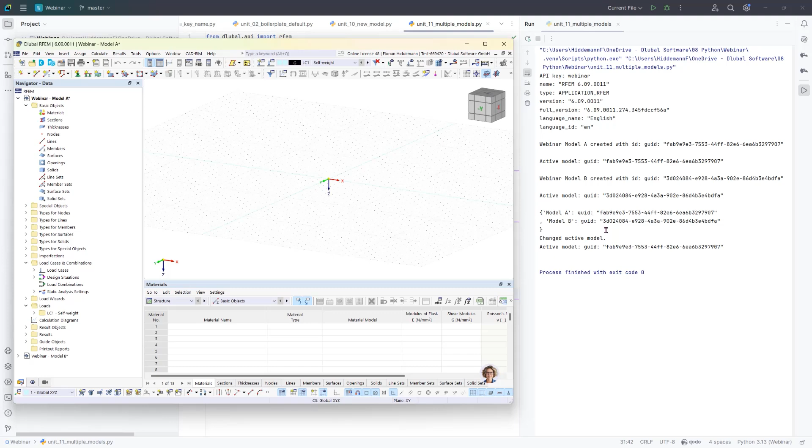This is the active one. The second one, model B, is created with this ID. RFEM switches the active model to this one. This is stored in our dictionary, and I can change back to model A with just a simple call.

If you are in an active model, every other API call uses this model for manipulation. So you can have in one connection working with several models, switching back and forth and getting information at runtime about which model you're actually in and where you want to go.

Another important use case to work with models is if you already have an existing model as an own RFEM file. In this example, I will open a model from an existing RFEM file. This is stored and set up here as an absolute path. It's in a raw string, and we just make our connection and say, open the model from this path.

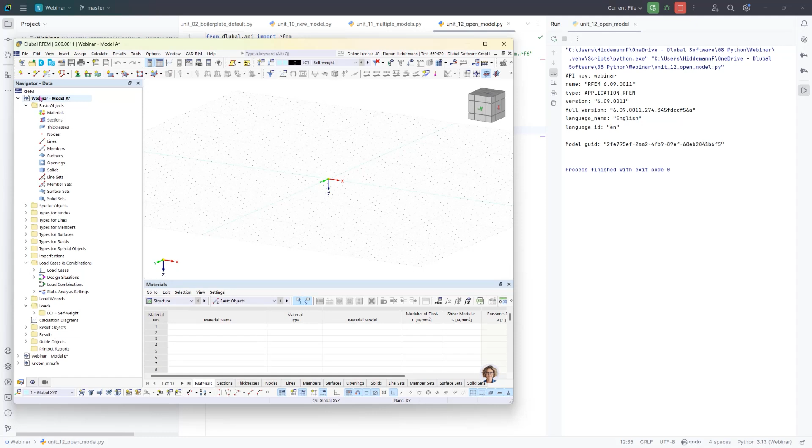What we can show just here—I prepared a simple example model. So we can see it opened and get its model ID back.

This model is the one prepared, and I set it up with other units here as a model setting, where you can see it's not a freshly created one. Important to say, we are working with SI units here for all input values and for all output values, which we see later on in the results.

This is now the installation and getting started part, working with multiple models. Now we change to the principle of operation, how to actually work with RFEM objects. We'll look at the mapping of the structure navigator and the API structure, and how to deal with the properties and make new objects and update them and so on.

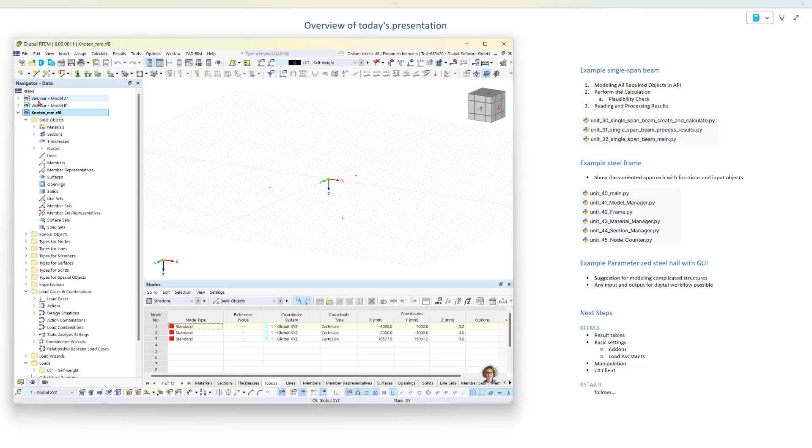If you are familiar with the RFEM structure itself, you will see that our API is trying to get as close as possible to the structure in the navigator. You have here some basic objects, structure core, structure advanced as we call it in the API, types for nodes, types for lines, and so on, nodal supports. Everything you can see and navigate through, we try to replicate as far as possible with the structure of the API itself.

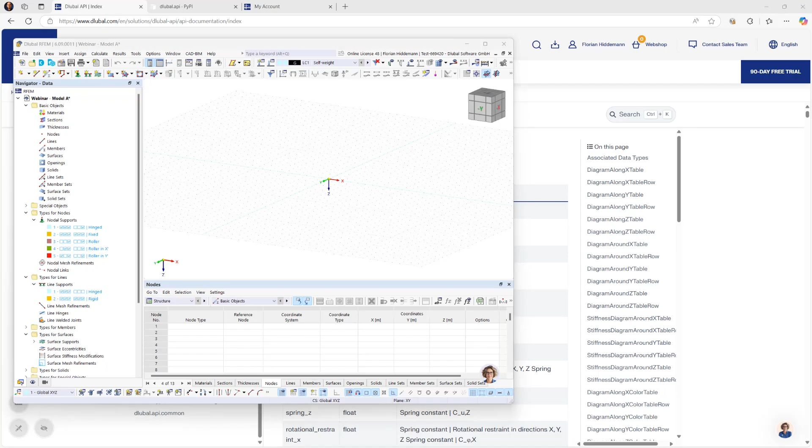So you have also structure core, which is lines, nodes, members. You have the loads, the loadings, and you have types for nodes, nodal support. This really corresponds to the structure you can see in the main program, just to give you a better insight into where to look for some objects. So how is it working now? We start by creating a simple node.

When we make a new model, this is called create node. First, I define my node with the wished properties. In principle, you can say we have two steps every time, or two separate roles.

One is I'm working with model objects from the API. You can see here, this is a node using the structure core from the RFEM package. This object here is used to define what I wish as a user to model in RFEM. And this node object is given as a gRPC message to my actual API call.

The API call, we don't have so many API calls like in our first generation. You can see the API call itself, it's very lean. We have calls to calculate, to create things, to delete things, to get things, save things. There are some specialities like a plausibility check and so on, working with the models I showed you. But this is really it.

There are 30 or 40, maybe in the future more, API calls, and a lot of objects to define and transfer. All properties, all model objects are defined by these model objects API.

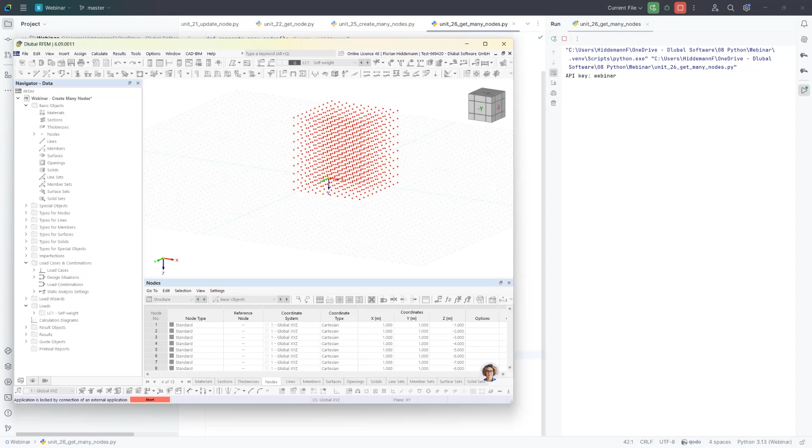So let's see what is happening. Just open RFEM, create these nodes again, and what's happening right now is we hold here, print and hold, and say, okay, show me this node list you returned. This also is a self-defined class in our package.

It's not a dictionary, it's a special object which is representing our object ID list. This list has all the node IDs and says, okay, this is an object from type node. So this is a way to get back which ID is defined via this call for many nodes. It answers with: I created 1,000 nodes, and here's what I created. The last one has number 1,000, and it was a node.

So if I want to manipulate these nodes later on, first I need to create my own list where I store dummy objects which contain these node numbers. And to make an iterable object from this returned node list, I have to add object ID after it. Now I can iterate over it in Python.

We will make a new real list, which is called dummy nodes. And for each item in this object ID list here, which is iterable, I will append a new object. It's a new node containing exactly this number we see from this output. So after that, we have a list with dummy nodes, and let's have a look at this.

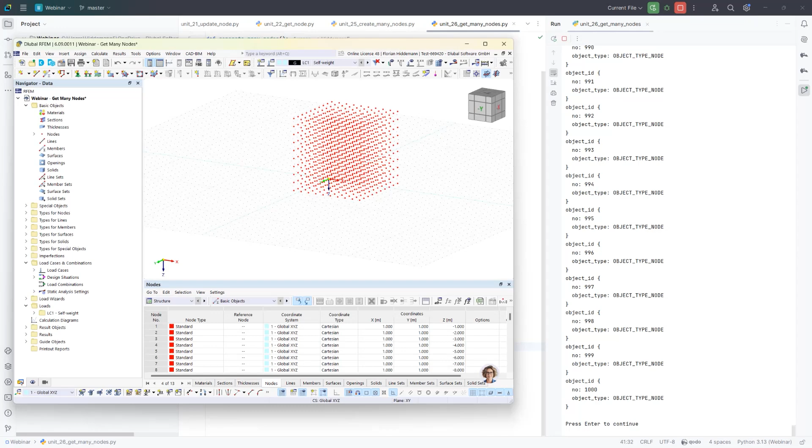Oh, isn't it working? Yes, no. Okay, now it's doing second and third one.

So we printed the list with dummy nodes, and if you print a node and the only information it has is its number, it prints its number. So we have stupid nodes which has their number, and with this list I can work later on to manipulate them. But this is the first example, a workaround how to get numberings from a node definition at the moment. We are working on improvements about it.

So if you have now the IDs, then you can ask RFEM, okay, give me the objects for nodes with this ID. And this is the last step here we just saw. This is corresponding to what you see if you get a single node information. We are doing the same like here with an object list, with a list of node IDs. And we can see these are the informations for each node we have created with the many nodes function.

So now we can also update a lot of objects at the same time. Like last time, it's an extension of the shown example. We have the returned object list, and I just made a helper function which is handling these object IDs and making the dummy list for me. It's returning the dummy objects. I show you in the last step here as an own block, and they are stored here. So we create the many nodes, save the returned objects, make our dummy nodes. The dummy nodes is a list with the IDs of the nodes, get the object list from that, and store this as node objects. And then I want to edit those coordinates from these objects by a specific offset.

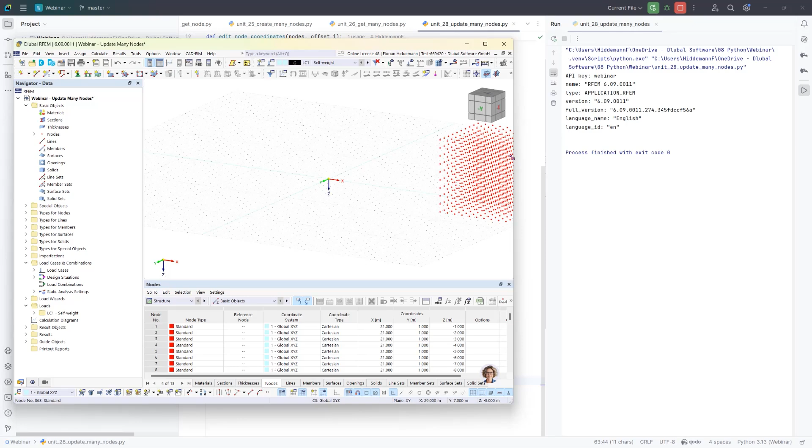So now let's dive in finally into the small real-life example of a single span beam. We will use the principles we got to know in the first 2 chapters here, playing around with nodes, and now go for other objects as well to model a single span beam.

If you look closer here, we are doing exactly the same like with the nodes. We will slightly restructure it here to make this work within our own create and calculate function. The single span example is split into create and calculate, processing of results, and a main script which is calling both of them by importing these unit examples here.

Let's have a look into create and calculate. We will again define all model objects with one creational call, create object list, you know that in the meantime. And the specialty is that we are defining all model objects in one list, not only the nodes. So if you can see here, yeah, we have the same small import with Dlubal API RFEM, and we have the nodes, we have the line, we have material, section, and member. Everything in this structure you already are familiar with.

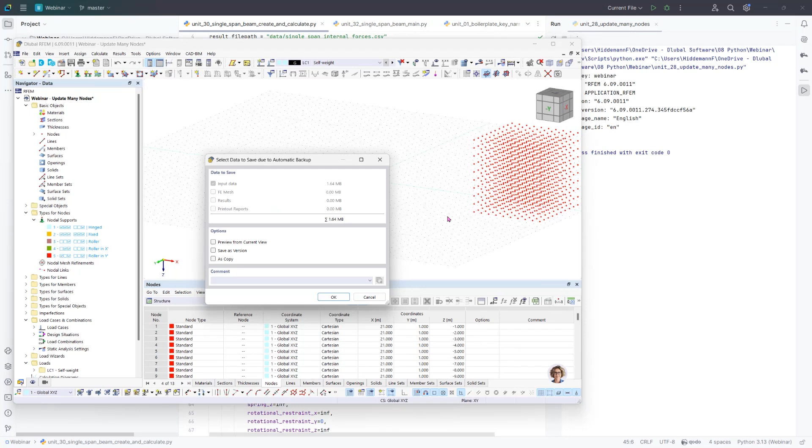If you want to define material and section, maybe you know it from applications in the past, just go into these RFEM settings, for example, and try out what's happening if you look for a special string. What's happening in the background is if you put a string as a name for a material or cross-section, RFEM looks up the first option it finds and uses it later in the program, so you can check it on the fly, what is what.

In this way, we also define the loadings, design situation, static analysis setting, load case, member loads. Remember, it's defined in SI units.

And why is it important to define everything from scratch? With this call, I delete all existing objects in the RFEM model. By default, if we create a new model, some objects and load cases come as default, and with the delete all objects call, every one of these objects is deleted. So you have to make everything from scratch.

As well as here, as in the examples on our website, you can see different types, not only the nodes I showed before. You can have a look later on, or every one of these unit lessons will be provided after the webinar for you. So once you've defined the object and created it, we will perform something new.

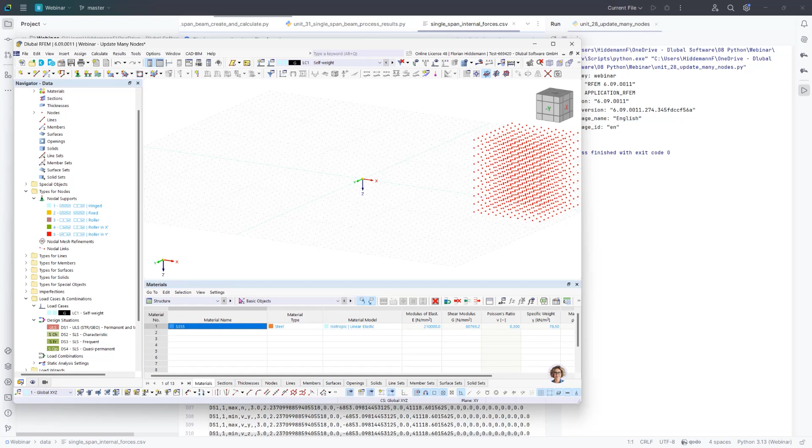The result format you will get is more or less directly orientated — this is the CSV we will get. It represents the table you can also view in RFEM. So the whole structure of getting results is based on the structure we get in the results table too.

Let's see what happens in the program if we start it. You can see what happens in the background on the right side as well. The plausibility check was successful, true, so the calculation just started. You can see it here, bottom left.

And now it is getting the results, processing them, and printing out what we defined here in our little process script, just to give you an idea how this is working. Let's check what we found out.

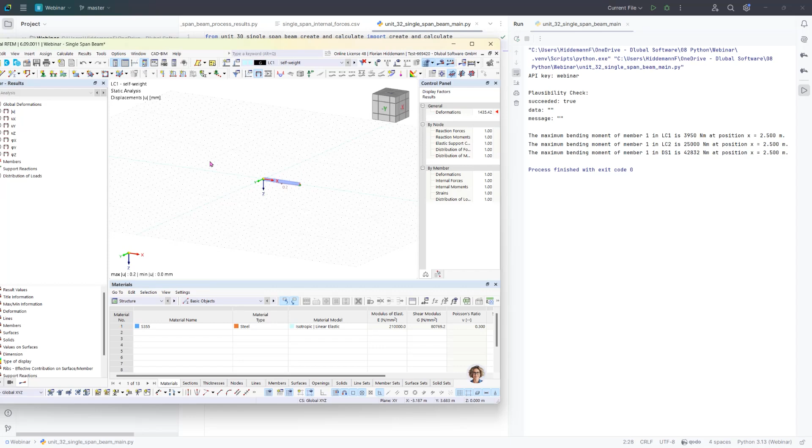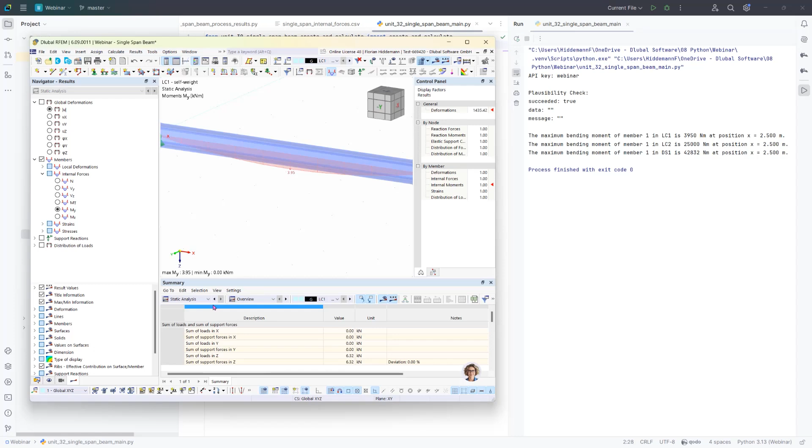If I go to the server here and activate the results, we looked for the maximum bending moment over the y-axis. So it's 3.95 here in SI units, Newton meters, at position x, 2.5 meters. The whole beam here is 5 meters. So this is plausible, and you can see if we have the results table for static analysis.

And go, for example, into results by member, this type of presenting the results and the internal forces here corresponds with the logic the CSV file is built up in the background. So if you get the results, it's more or less oriented to the logic you see in the result tables. Again, we try to make it as comparable as possible to the RFEM structure, like with the navigator for input files, for input objects.

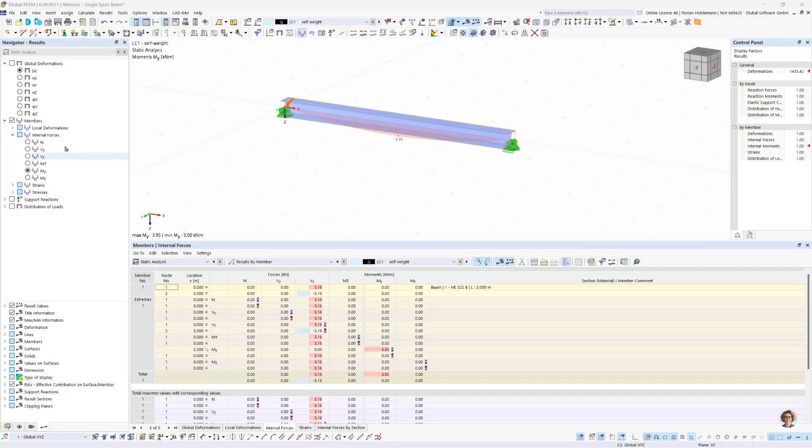So what do we have as a maximum value? 42.83, and we found the same value in the CSV files. So that worked quite well. And now you got an idea how to work with a full case of a small model.

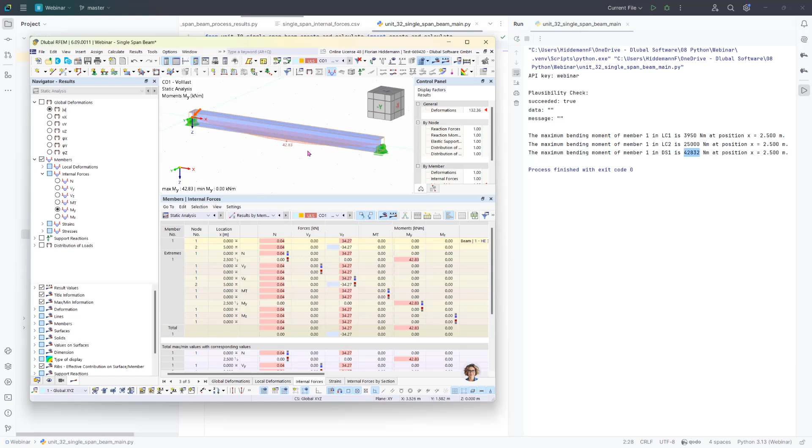Calculate all is one of the API requests which costs Dlubal credits. And you can see if you perform this action, you will see a new API request in your extranet, and we used 1 credit for 1 solver run. So keep this in mind when you need to check which call was requested for some credits.

So in the final minutes, I will switch to another 2 examples. Just a quick glance at the steel frame here, which showcases how this could look like in a more class-oriented implementation. Because what's important to say, you don't necessarily have to work with the with statement and RFEM application. Of course, it is also possible to write your own class, for example, and open the connection within this call. But then you have to handle closing the connection as well, to ensure that RFEM opens and closes, which in the with statement is managed by Python automatically, because the implementation of our application method here handles this together with the with statement.

But if there is the need to define your own classes for testing or for productive use, feel free. You can use, for example, your own model manager, which opens and closes connections with your own set of code. And yeah, it's quite another style here, you figure it out by yourself. You can also make your own classes for frames and so on, for calculation of nodes, for members. Just to say, it's not necessary to work with the with statement.

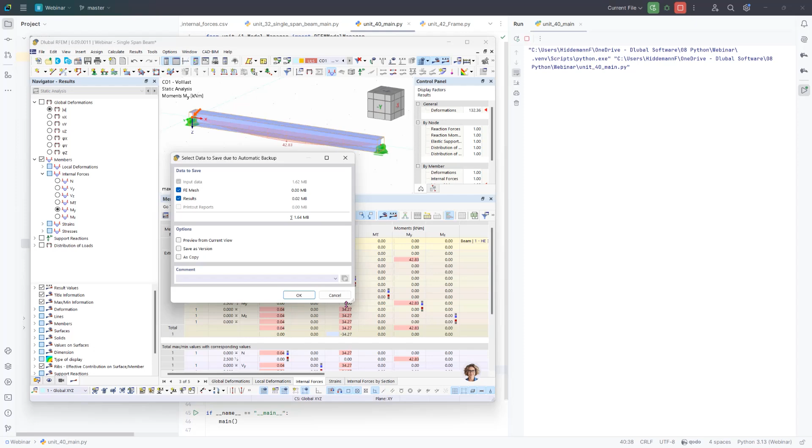So let's see how this is going. Of course, the connection then opens and closes as well. And here in this example, I used a class for a frame to model two different frames, which build on an own class I have written with separate properties. You can play very creatively, defining your own classes, your own model definitions, put some complicated logic inside. And what's really nice about it, here in the frames, there is no single API call included. Everything will be handled in the model manager by transferring an object list to actually build these objects.

And in this example here, because I don't like to repeat myself every time to make plausibility checks, I built in a method which automatically performs a plausibility check. So you can automate your workflow as you wish, so that this tries to calculate, and if the plausibility check in this case is not successful because the model was not supported - we see here, we just built the frames but with no support - then it doesn't calculate, and everything is handled well, and the connection is closed because it wasn't successful. So just to get an idea what is possible with that.

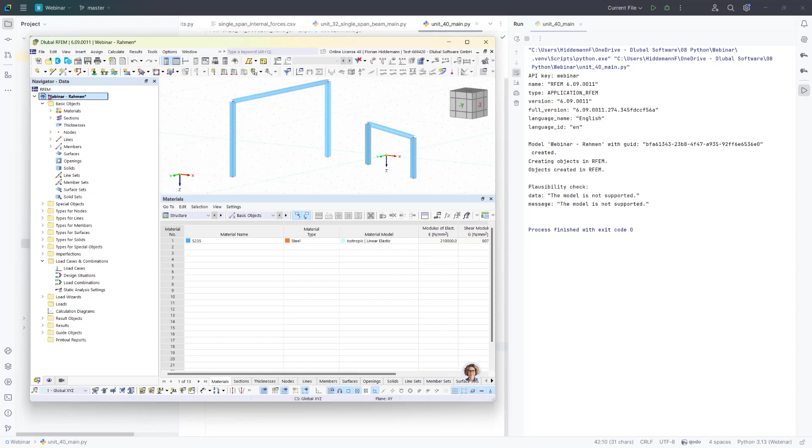And finally, we will have a look at the steel frame, which my colleague provided me, thanks to Robert Milrath. So let's close this model and switch to this project. We prepared this in a way that we will see our own graphical user interface. Let's see. Here we see this graphical user interface, and I will open RFEM in the background.

So just to give an idea, you can do whatever you want with input values. You can do whatever you want with the results you get from our API. So just as an illustration here of what is possible, you see you can program yourself a UI, web application workflow, a database workflow, whatever you need.

If we create this parameterized steel hall here in the background, you will see there is a time-consuming process opening a project file - this is what's taking some time at the moment. Once the model is opened and the data is loaded, it will be very fast to model all these entities we defined in the program. You will see the performance speed advantage on this model, but don't get confused about reading data here - this is not the API call taking time right now.

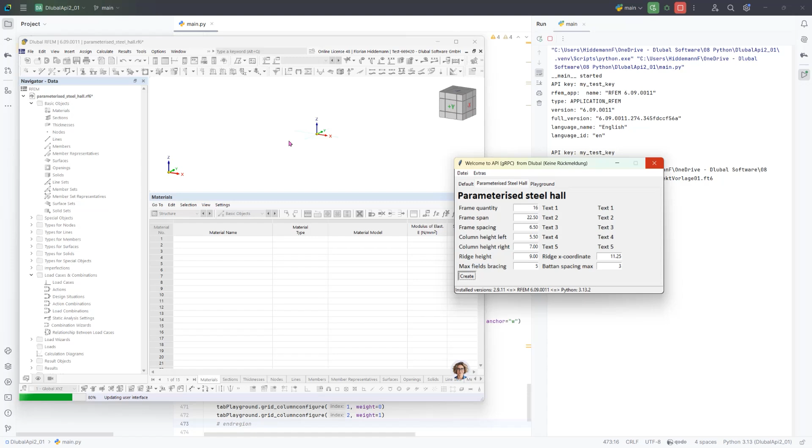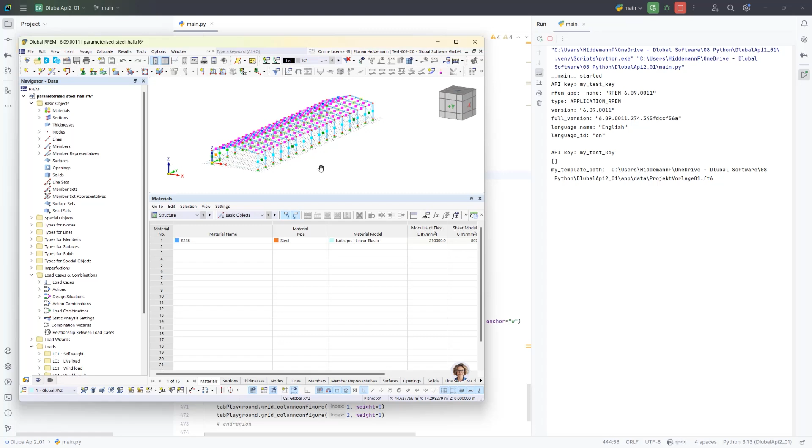So we loaded the array. Now it's opened. And it generates now the objects. So I misclicked it - here you can see it. We see the parameterized steel hall.

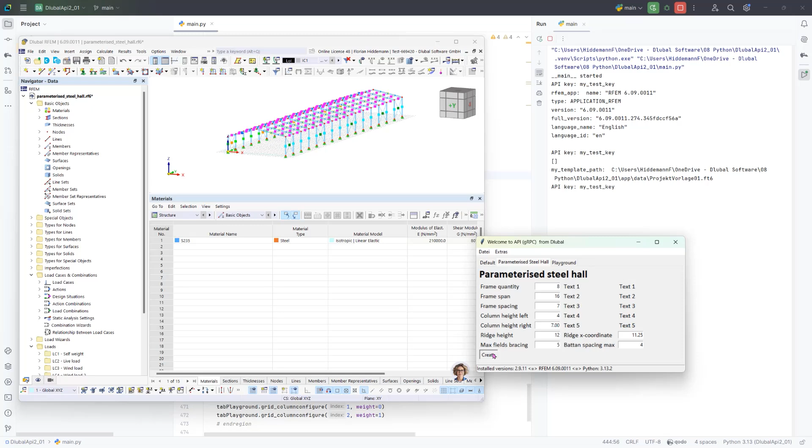Just to get an idea about a second run with different parameters, you can obviously choose your own values here, make different settings, just to play around a little bit with it and get an interesting geometry. You see, this can also be fully automated in the background with a headless server version.

So feel free to use your fantasy and creativity to create your own workflows. I'll let this load in the background again - we'll jump into the results later on. It would be very nice to go with it now in the next step and set up some add-ons and load assistants. This is one of the next steps we are implementing for the API, trying to enhance the result tables so that every important option gets the results in the program.

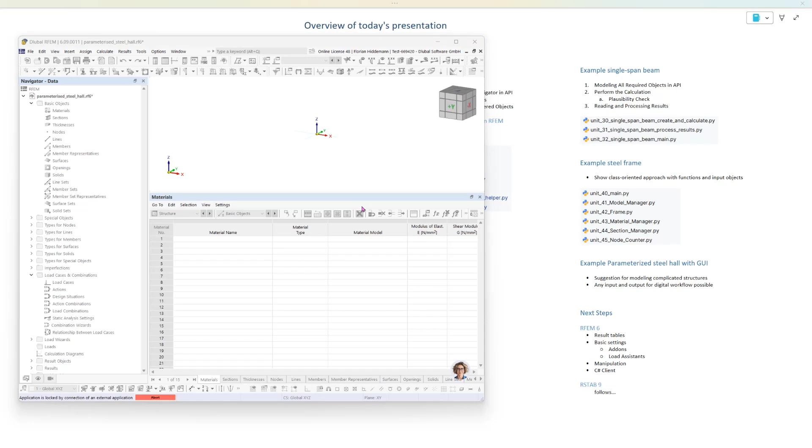Now you can see once it plopped up here, the model opened and it modeled. This is the speed of the API, which is much faster than the loading process of the template here. So yeah, you can see it worked.

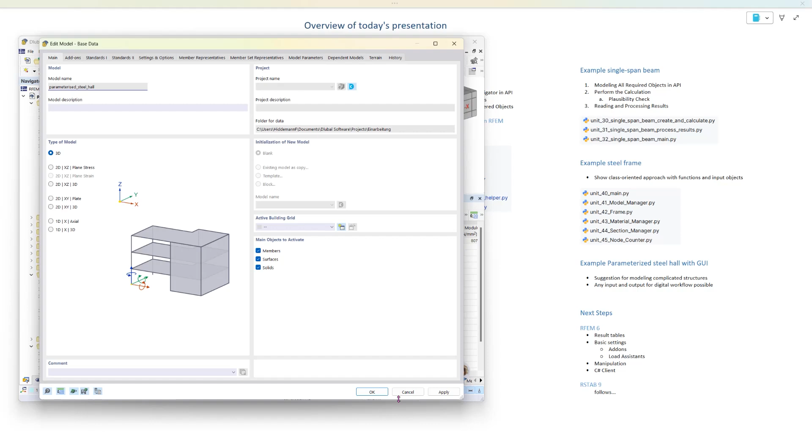What needs to be implemented in the next step is really manipulating with the API these base settings, so that you can activate different add-ons - in fact every register here, except for the terrain. Terrain is a model object to steer this and use add-ons, and also use the load wizards in combination with the normative standards. So this is some of the next steps.

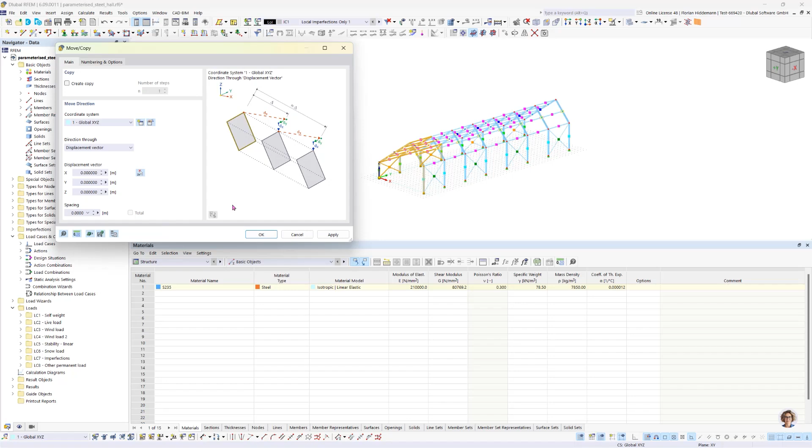Also for the Python API, we will allow the manipulation of some objects which are used in the manual operation with the graphical user interface. So there will be a special version in the Python API to use these manipulation functions also via code. It's more or less interactive then, and you can react to the model and use the copy feature to create those frames or other things. This is currently in development.

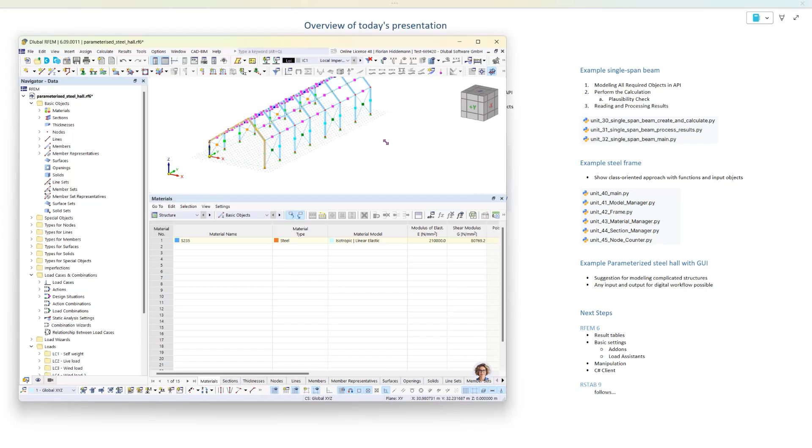Also good news for those of you who are using the C# client in the past - since we are using gRPC and protobuf, it is technically possible to build your own C# client, and we will do this in a basic version for you. Currently we are thinking about how to provide it, where to give you the package. In the future, we will try to give this as a second option to the actual Python solution we already offer. And after we do those basic steps here for RFEM 6, of course RSTAB 9 follows as a second big application where we will implement the API.